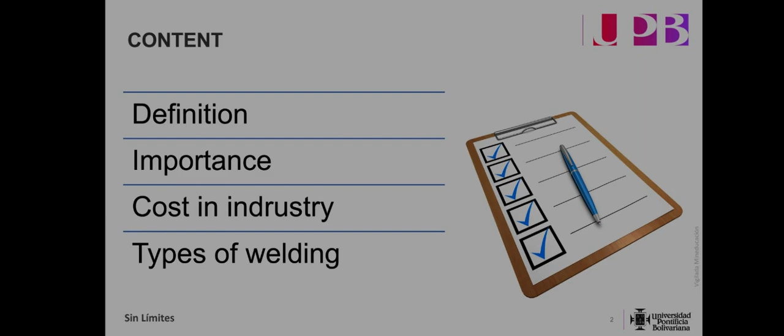Let's start. To begin, we will talk a little about the definition, importance, cost in industry, and types of welding. What is welding? Welding refers to the process of joining or fusing pieces together using heat to create a continuous bond. The heat source in welding is typically an electric arc or flame produced by the power source.

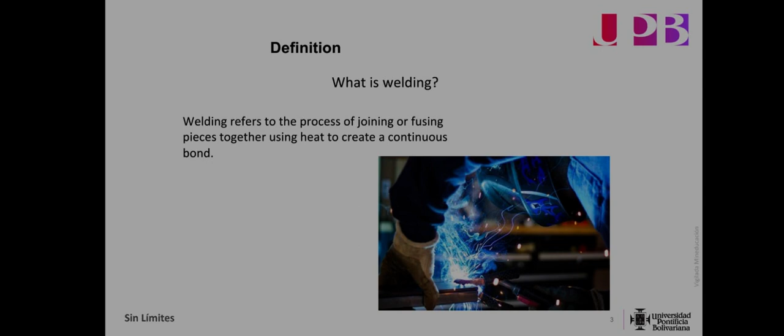What is the importance of welding in the industry? Welding plays a crucial role in the metal joining process. It is widely used in various industries for fabrication, repair, modification, and assembly of metal structures and components. Welding helps in reducing weight, reducing material, and provides strength and durability to the joined parts. It is essential for construction of buildings, bridges, ships, automobiles, and many other industrial applications.

Cost. The costs associated with welding can vary depending on several factors, such as the type of welding, the material used, the size or complexity of the part being welded, the required quality, the location, and the availability of skilled labor.

Some of the costs associated with welding include material. Welding materials include electrodes, shielding gas, and consumable cleaners, among others. The cost of this material can vary depending on the type of welding and specific project requirements.

Equipment and tools. Welding equipment such as a welding machine, torch, clamps, and safety devices represent an initial investment. Additional tools such as brushes, grinders, and fume extraction systems may also be required, which can influence the cost.

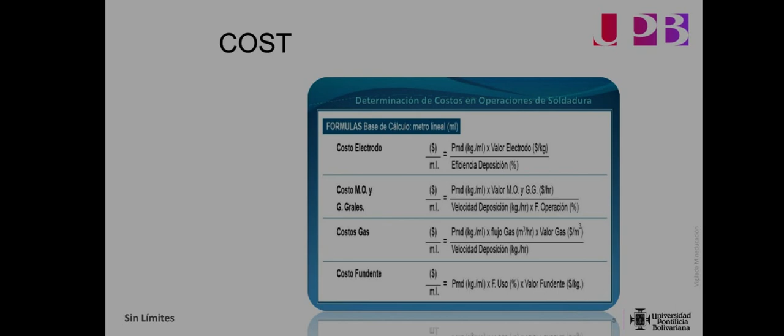So these are only general factors. The actual cost can vary widely depending on location and specific circumstances. I would recommend checking with a local welding supplier or expert for up-to-date and accurate information on welding costs in your area.

Regarding the electrodes used in welding, there are different types, each with its own characteristics and applications. Some of the most common electrodes are tungsten electrodes. These electrodes are designed for TIG welding. They are primarily made of tungsten and are used in applications that require high-quality welding, such as stainless steel, aluminum, and titanium welding.

Coated electrodes, SMAW, also known as stick electrodes, are used in shielded metal arc welding or manual metal arc welding. The electrode has a coating that provides gas shielding and imparts specific properties to the weld metal, such as corrosion resistance or gap filling capability.

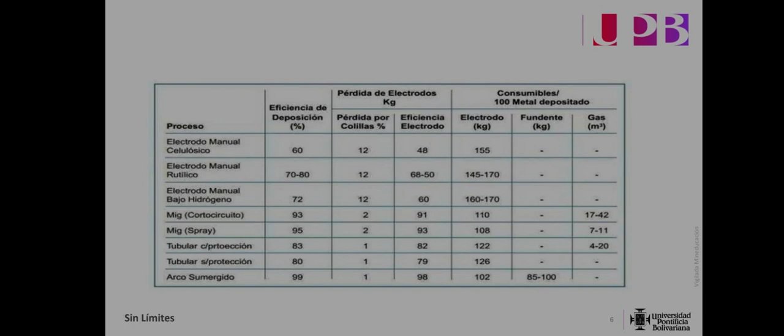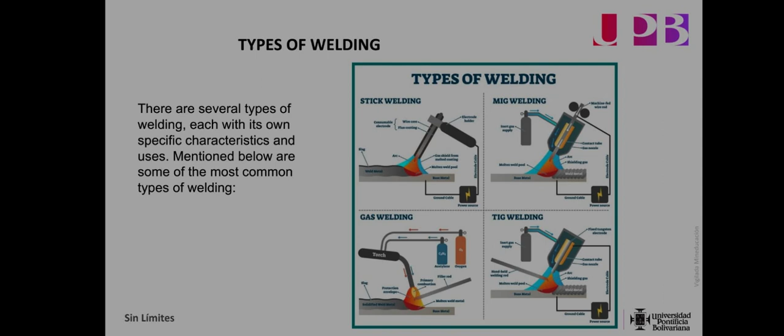There are several types of welding, each with its own characteristics and specific use. Here are some of the more common types of welding. Number 1, electric arc welding. This type of welding is done by creating an electric arc between an electrode and the base metal. The heat generated by the arc melts the metal, and the electrode is used to provide weld material.

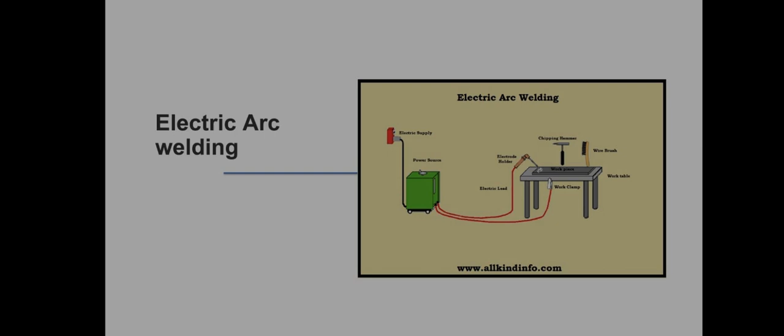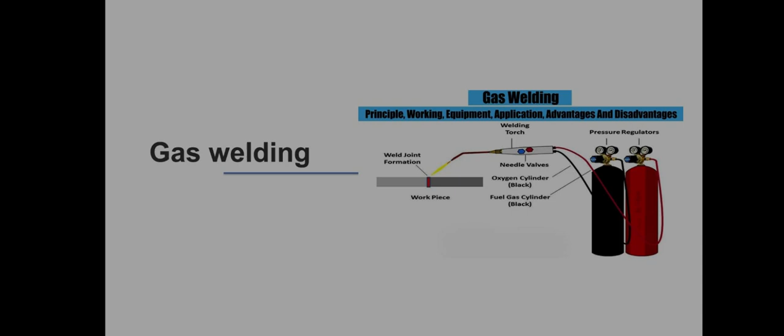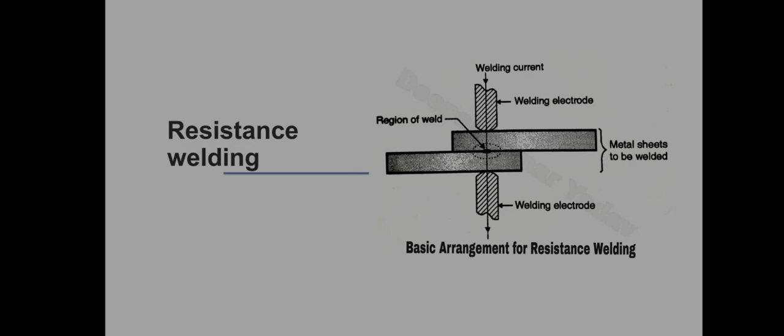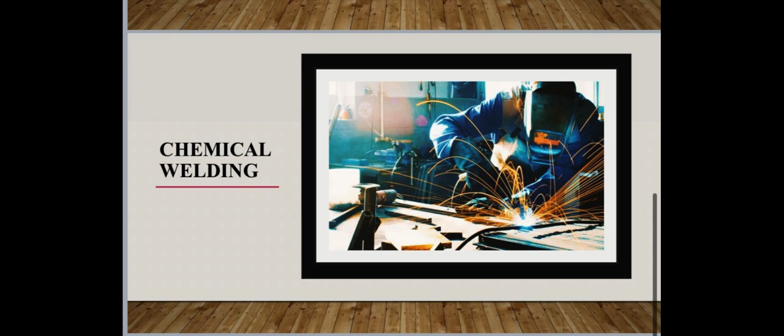Chemical welding, also known as structural bonding, is a process in which materials are joined using special adhesive instead of conventional welding. Unlike fusion welding, which requires heat to melt the base materials, chemical welding uses chemicals to join the surface of the materials. Number 4, laser welding.

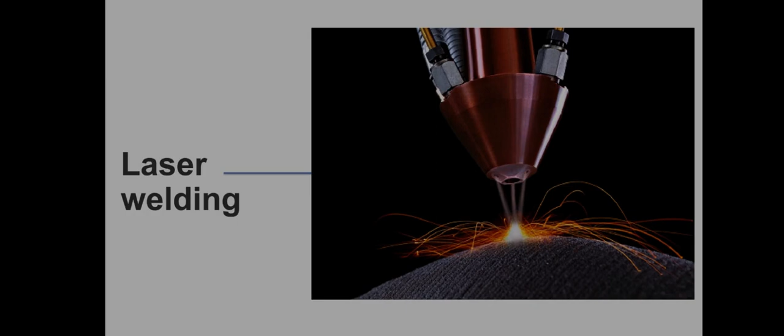This type of welding uses a laser beam to melt the metal. It is mainly used in the manufacture of electronic components and in the aerospace industry.

Number 5, ultrasonic welding. This type of welding uses high-frequency sound waves to join two pieces of metal. It is mainly used in the automotive and electronic industries.

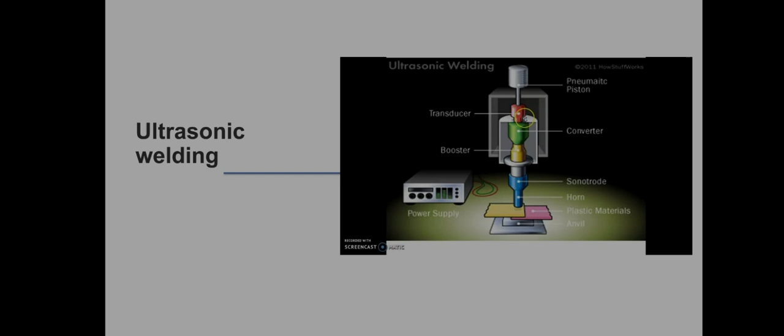Blast welding, also known as explosion welding, is a metal joining process in which the energy generated by a controlled explosion is used to join two pieces of metal together. Unlike other welding methods such as arc welding or resistance welding, blast welding does not require direct heat or fusion of material to achieve the join.